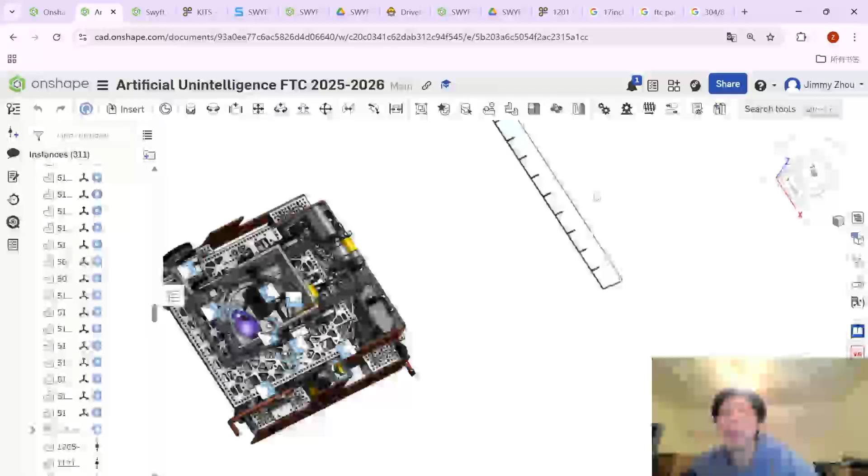So let's start from here. Let's just make a little 32 millimeter box here. Remember to press Q to make it a construction. 32, enter, 32, enter.

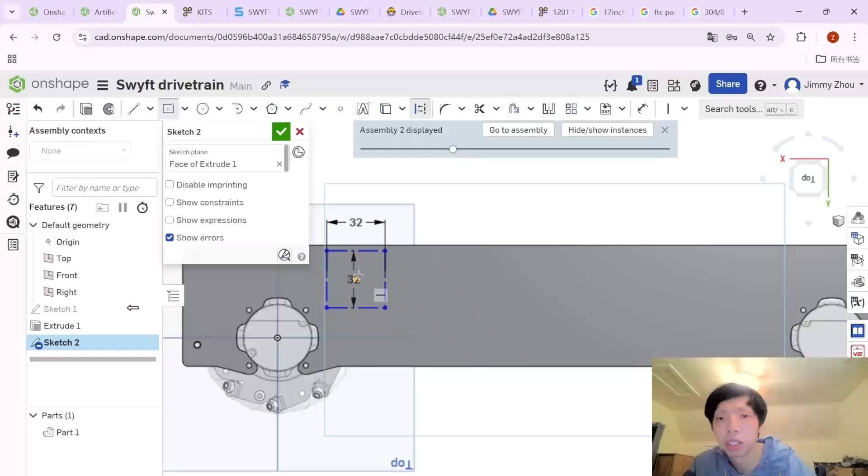And then let's make a bigger box to this. Basically each of these corners is a mounting hole here, so let's make an outside bigger one, 48 times 48, to simulate the channel. Okay, so there we are.

Now we need to place it where we think would be best. What about, let's just place it right in the middle. So let's find a median line. So it's around 68.

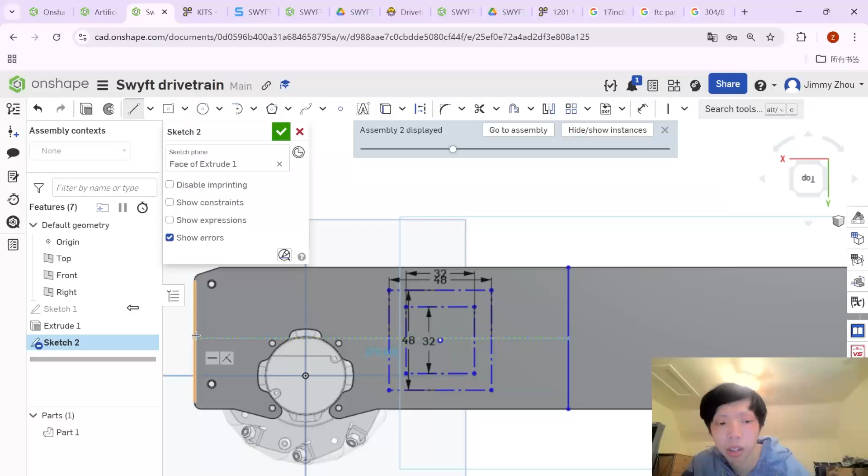Q, let's do 180. These don't really matter that much, but I'm just constraining out of habit. Everyone should constrain out of habit basically. So yeah, now this can only move along this line.

And now we need to make sure that this does not come in contact with the wheel that much. So let's just say we can eyeball this. It doesn't matter, it's not like a value that matters too much. But let's actually leave a little bit of space here, kind of for a spacer.

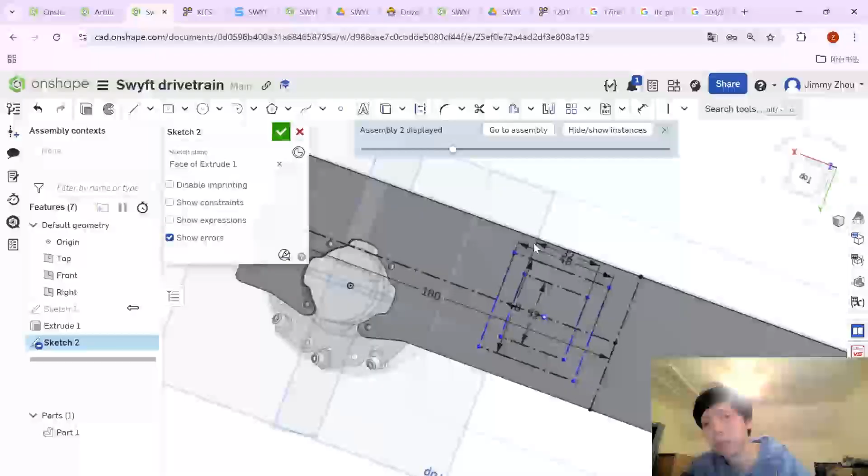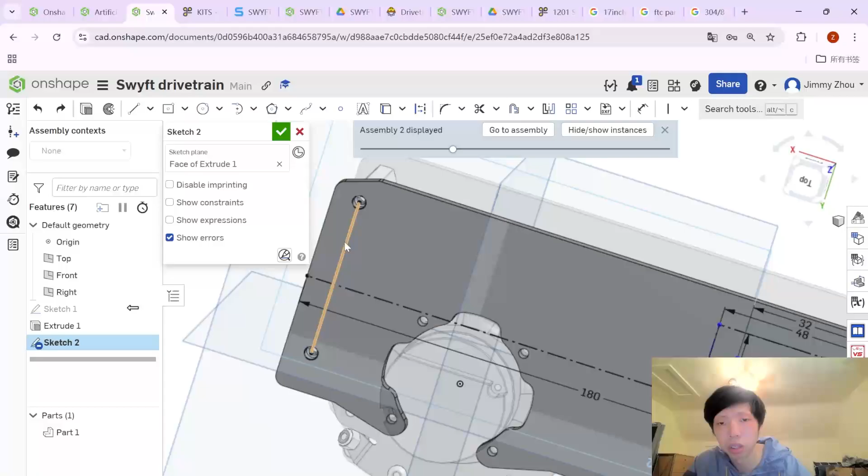And we need to work in multiples of 8. So one thing to note is that we need to work in multiples of 8. Let's just do a Q here to kind of make these like this. Always work in multiples of 8. Control C, I did not need to do the 48. So let's do multiples of 8.

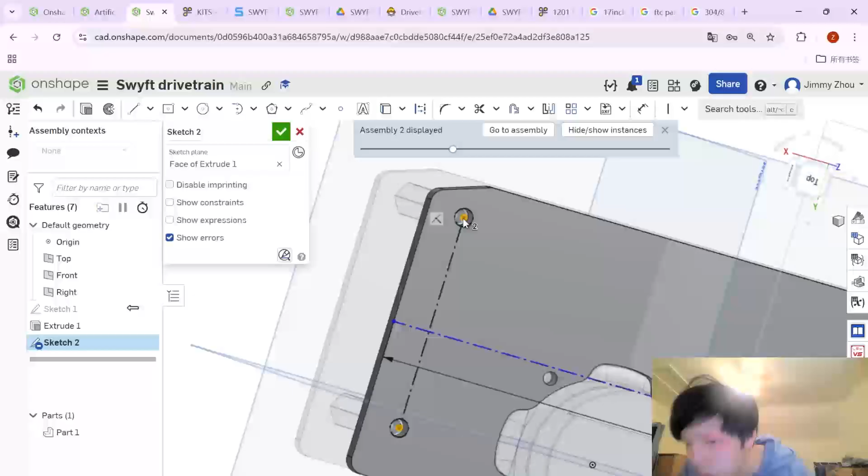What's the distance between these two? 22, that's not a multiple of 8, so let's not make this a midpoint anymore. No midpoint, I'm sorry. This is 48 millimeters from each other, so let's do 24. Sorry for the trouble, 24.

Always go by the mounting pattern. Always. Always. Always.

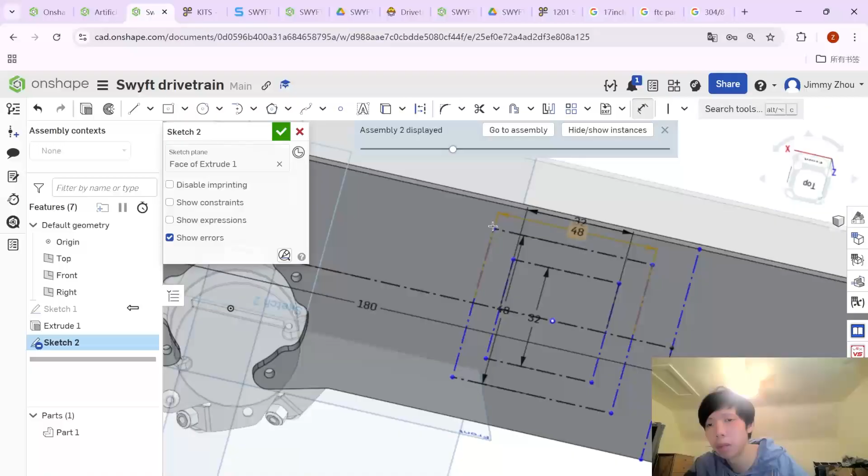Alright, so this is good, and let's do 180 millimeters away from here, let's do 2 standoffs. So what you can do is have a midpoint line here. Let's space them 32 millimeters apart from each other. Actually, let's do 48.

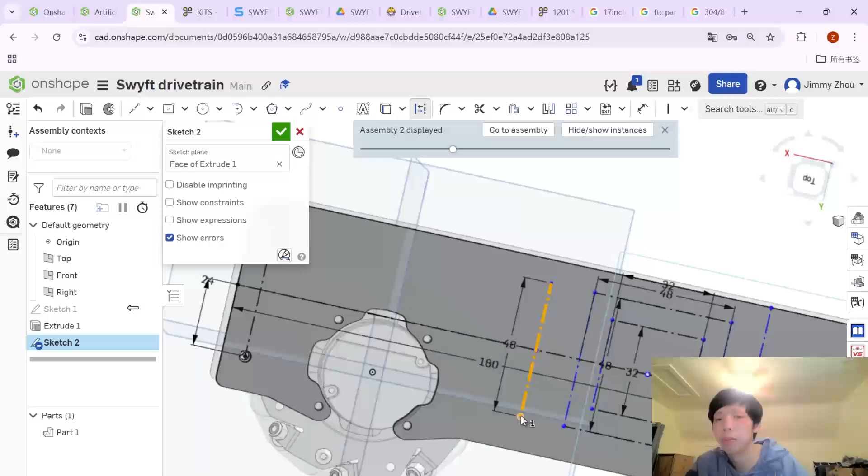So like the two ends of this will be actually 2 parts for a spacer. So we can just do C here. Usually do 4.5 for a 4 millimeter hole. 4.5. And then let's leave some space.

16 millimeters of space. 16 millimeters.

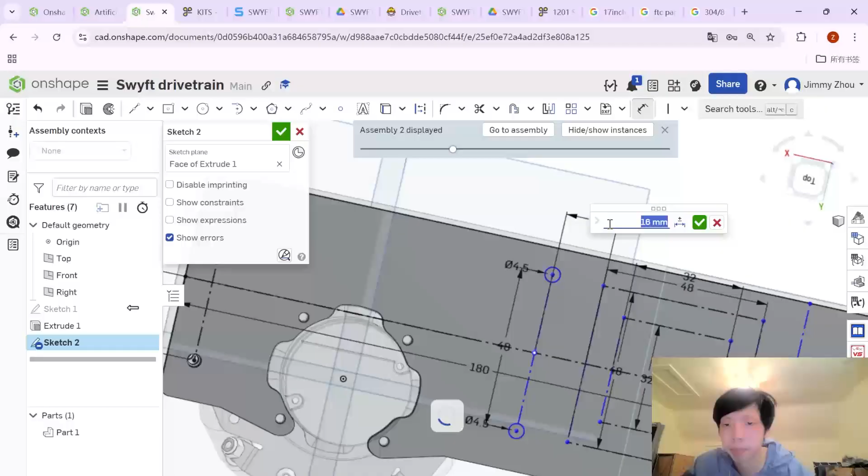So is there space for a spacer here? I mean, there is some, but let's just do a value that is a little bit greater. So 95, so let's do 108. This is a good idea.

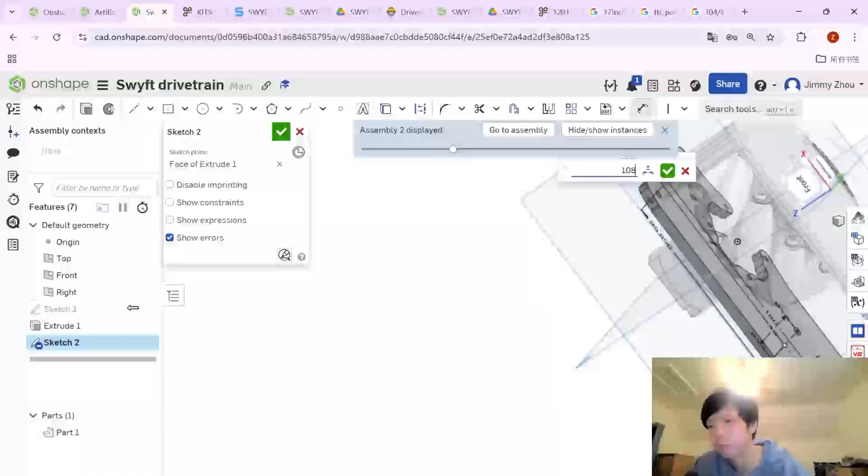I think this is fine, or 116. Is 116 a multiple of 8? I need to do better at math. No, it's not, so 114. No, 112. There we go, 112. Okay, let's do 112.

This seems to have some clearance, so good, let's do this. And let's just add 4 mounting holes here too. So 4.5, and then we can do a circular pattern if you're lazy, but sometimes it doesn't really take that much time, to be honest.

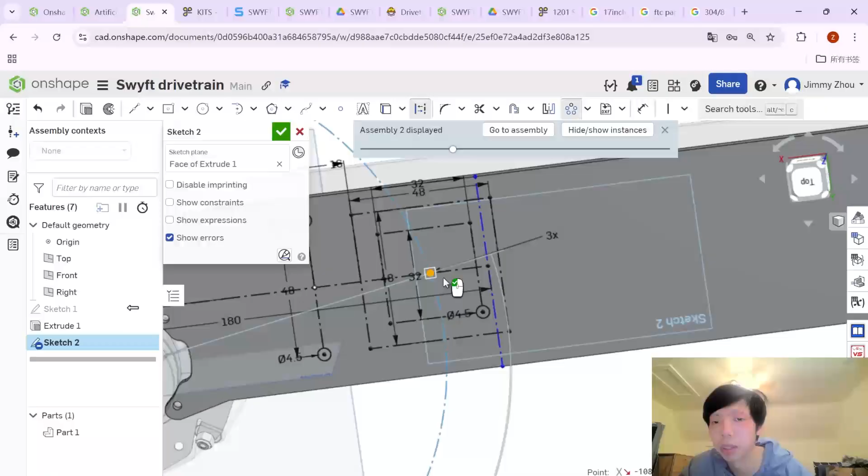Never mind, yes, see, so we need to choose the thing we actually want. Let's just do a coincident for this. I'm just annoyed by this thing. Select this, choose circular pattern, and then you need to drag it to the center of the thing you want it to rotate by. And then we need to change this to 4.

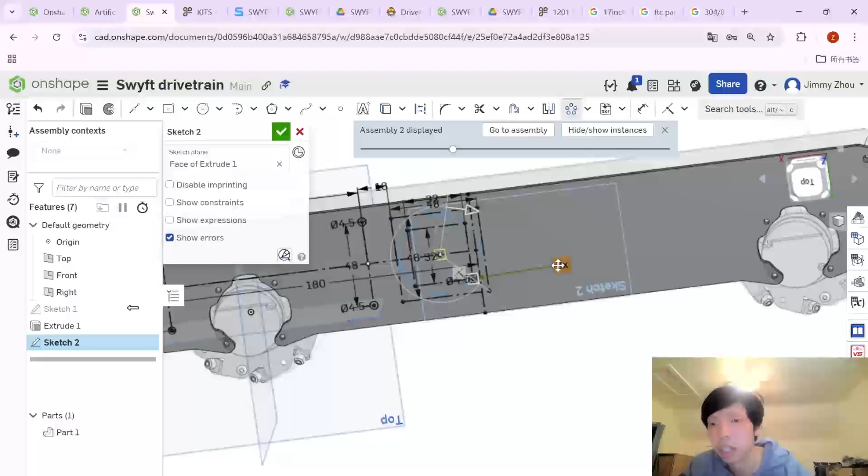And great, bravo. And then, like we said before, we're going to make another 32 by 32 mounting pattern for the other channel, around 48 plus 16 millimeters away. So let's do that too.

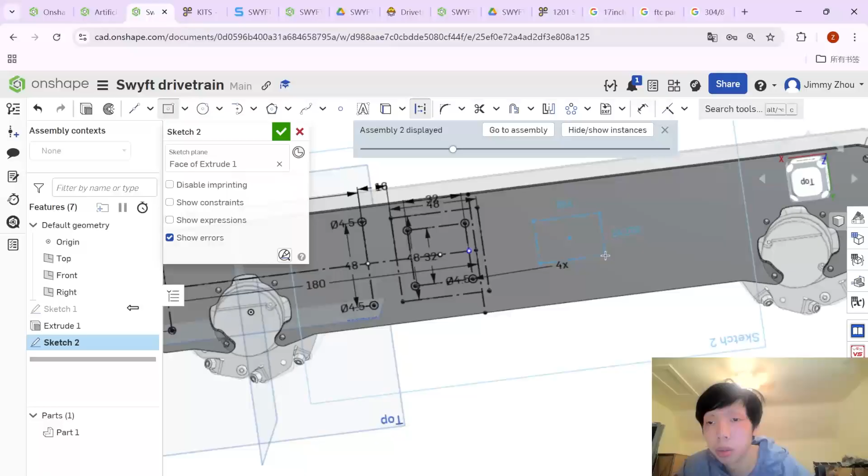Q, 32, 32, and then do D, 48 plus 16, 48 plus 24. Let's do 48 plus 24.

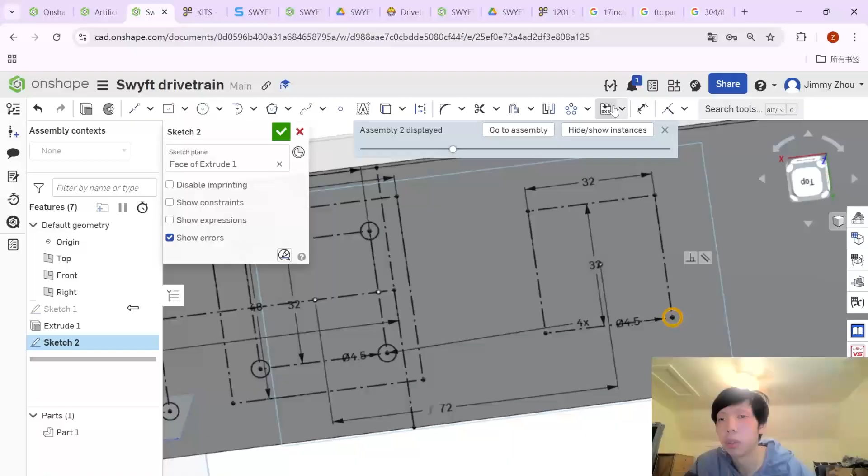Great, and then we can do the same here too. So press C, 4.5, circular pattern, drag center, 4.

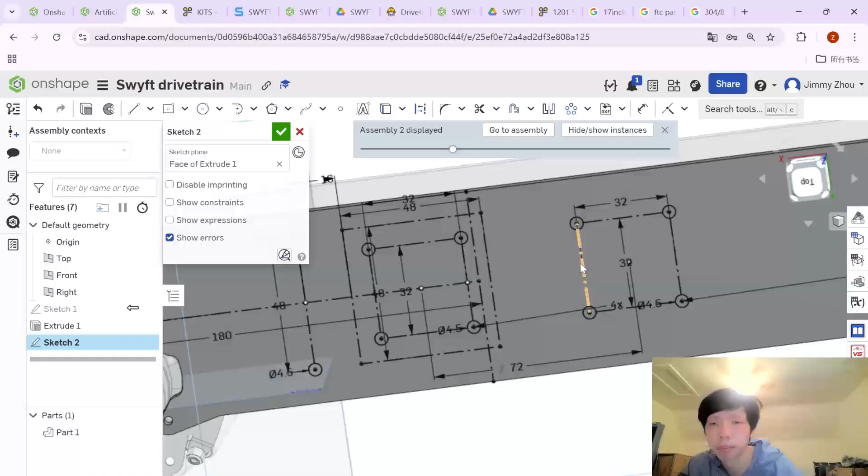Okay, good. So now we can also add another pair of spacers here, right? We can add more spacers, and we can add another pair of spacers here too, so just add a pair of spacers in the middle of this. The more spacers, the better, because your bot becomes a lot more impact resistant the more spacers there is, essentially.

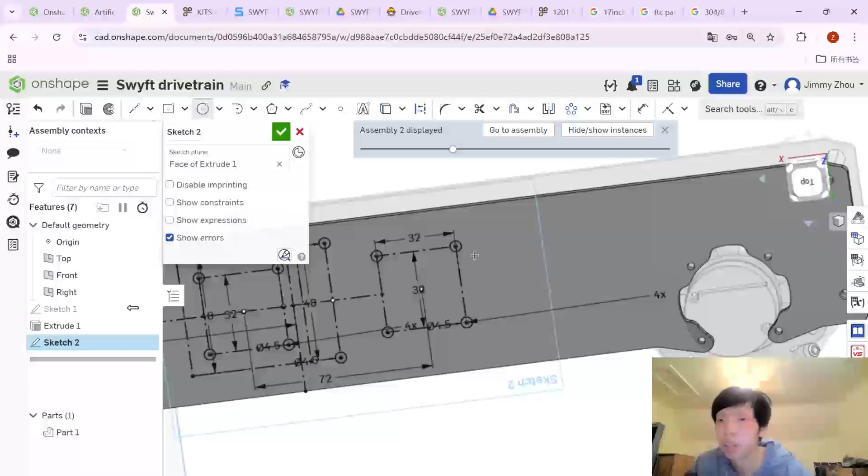48. So let's do one pair of spacer, okay. As you can see, the distance between this and this is around 20 millimeters. So actually we can do 20 millimeters, let's just continue this pattern.

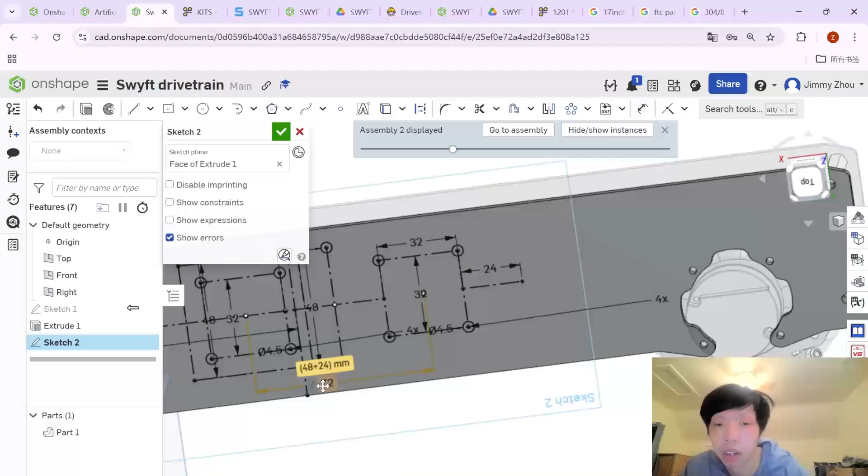Wait, 20 millimeters is not a multiple of 8. It is not, so we're not doing 20, we're doing 24. And for here, let's do 16, because as I just noticed, 48 plus 16 - as I just noticed this annoying thing, 24 is not divisible by half into a multiple of 8, so we always want multiples of 8, because that is the pretty thing. We always want multiples of 8.

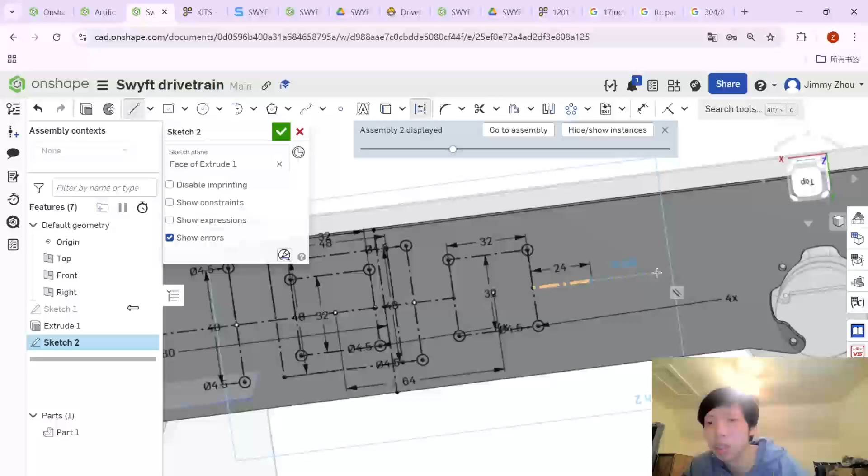Go build an ecosystem. The ecosystem. Nobody steps out of it.

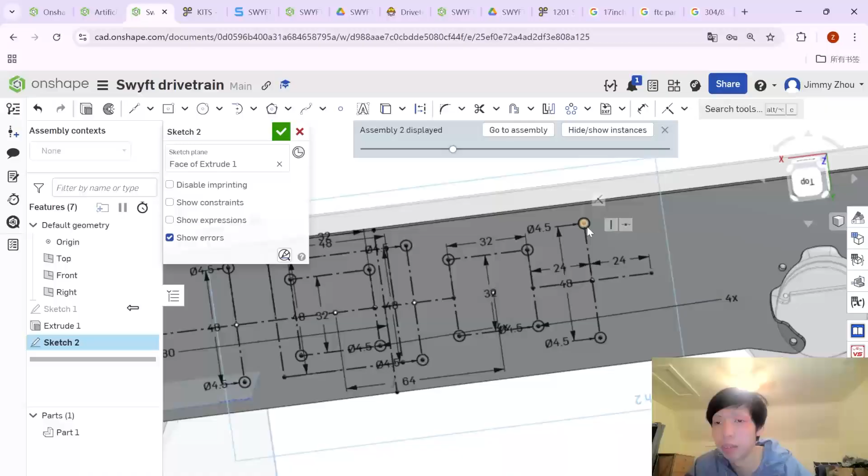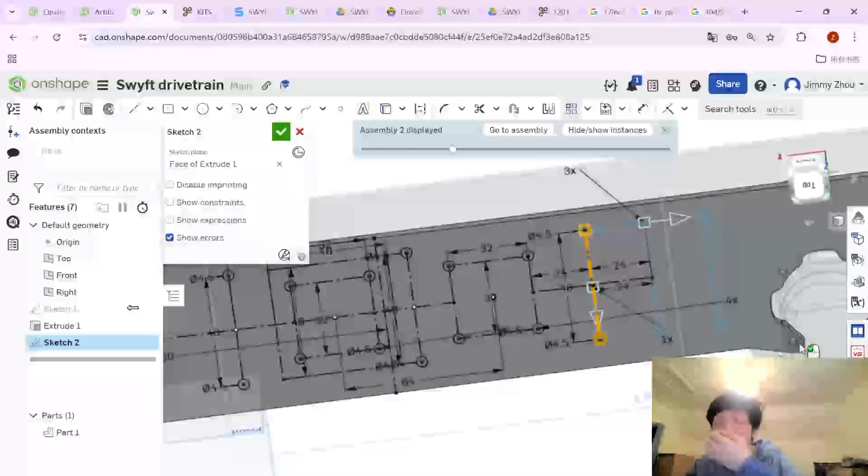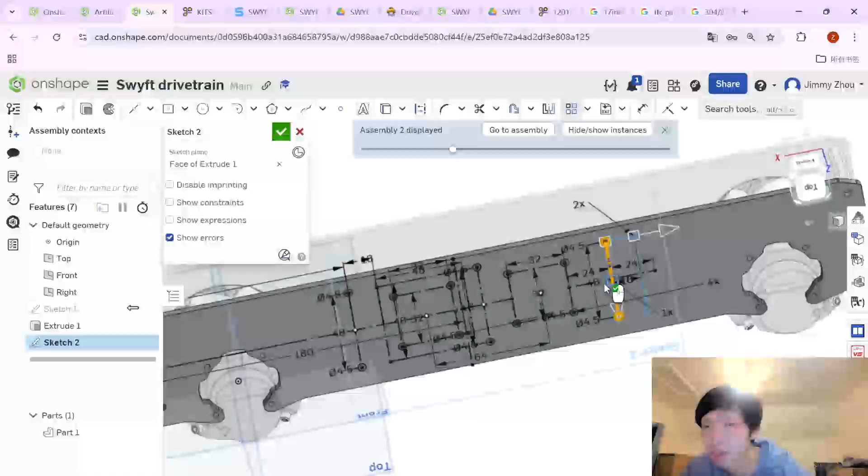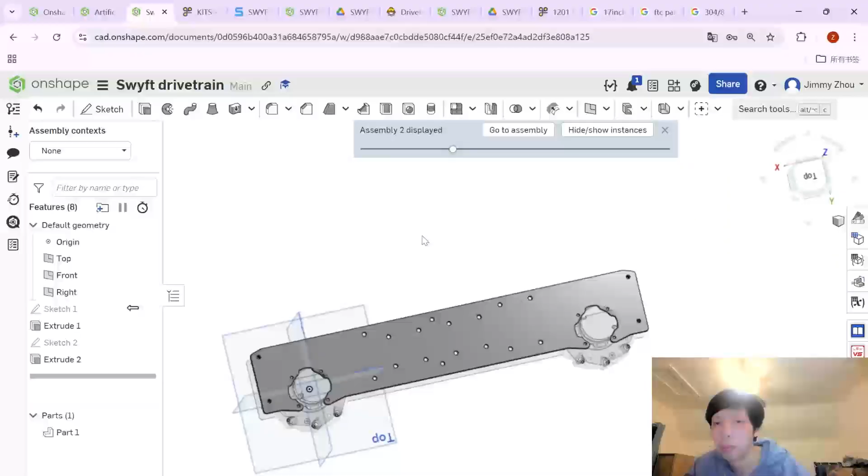So great, and now we can just all at once just extrude cut. And boom, here are our holes that we just need, basically. And then now we can import the middle parts.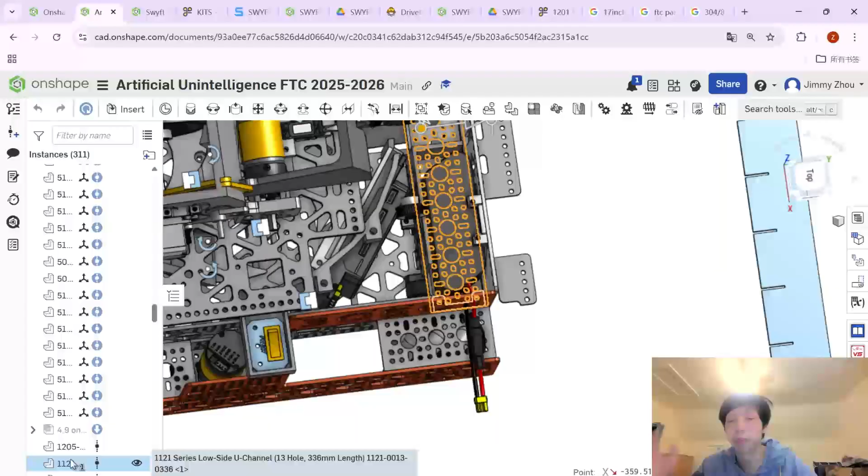So as we counted before, for example in this one, how many holes is there? How many holes is this? 13 holes, so let's import a 13 hole one, 13 hole channel. And of course we need to import 2 of the mounting blocks.

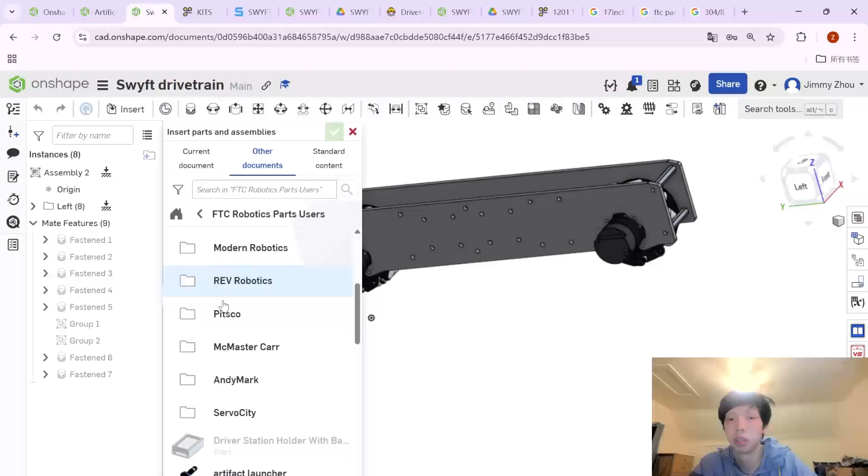So let's import the mounting blocks first. Not new sketch, go back to assembly. Insert. Parts, users. goBILDA structure mounts quad. Or what are you talking about?

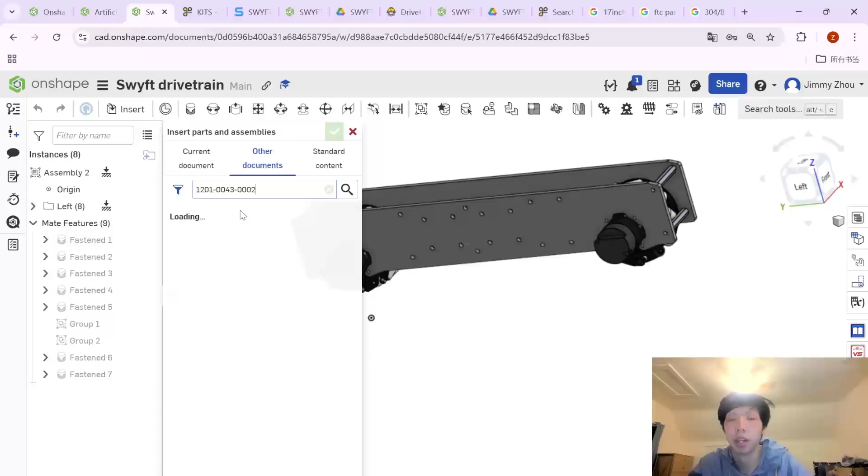Why is it not in there? Let's just search by number then. So you can highlight this, Control C, highlight search by number. Oh no, not search here by number, search here by number. And import it from some random other document. Probably have to search it again.

Okay, yay, this is some random other person's robot, but it doesn't matter at that point. This is like the good part about Onshape, that you can just copy randomly from other documents. So that 2 will be fine.

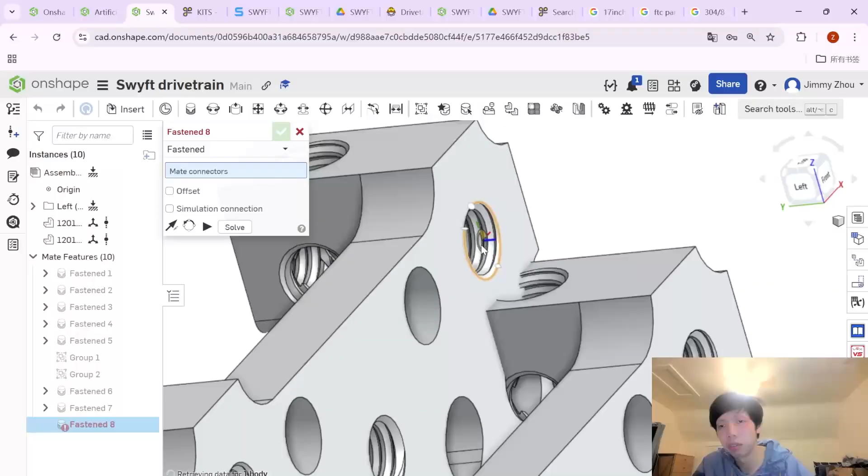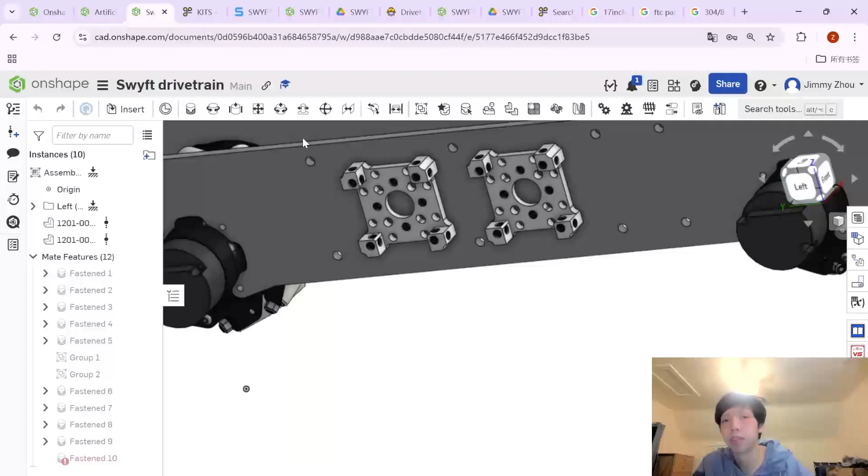So then we choose the center of this, and then we mate it on to here. Rotate, rotate, rotate, great, do the other one. Rotate, rotate, rotate, great. Then let's insert 2 13 hole channels.

So we can just import a configurable one, let's do 13 hole. And let's let it face down. So ideally this is going to be - I'm doing math in my head - around here, I suppose.

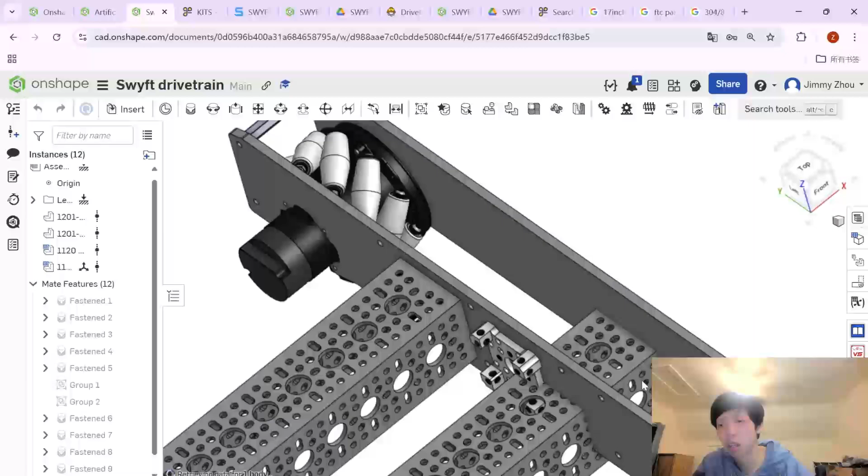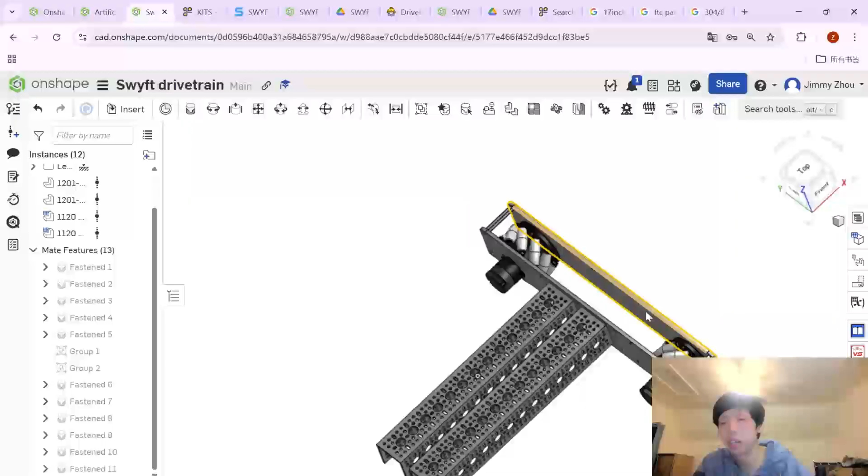To be honest, I am not the most sure. Okay, there's a replicate mode, so we can just do Control C, Control V.